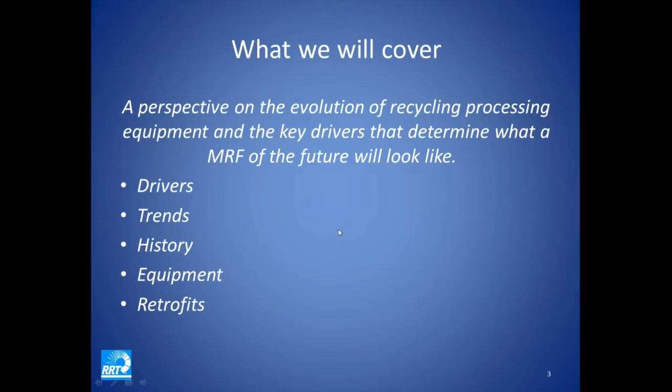So trying to see if we can have a little fun here and go through the topics that we'll be covering. A perspective on the evolution of recycling processing equipment, that's the core part of what we're covering, and the key drivers that determine what a future MRF might look like as we go forward. The agenda items are the drivers, the trends, the history, the equipment subjects, and we'll also spend a little bit of time discussing retrofits given the state of where we are with our MRF infrastructure.

So what is the future? Well, certainly the future is a reflection always of the past, and what we can see is much more commingling of materials, more types of materials, continuation of the lightweighting that we're all familiar with, where there's more units per pound, integration with collection, the careful integration of how material is collected and brought to a MRF to be processed, substantially more automation, the private sector gaining substantially more of the market share in terms of how MRFs are being owned and operated, although the public still has a very significant role in MRF ownership and operation.

What are the economic drivers and the yin and yang of the markets? So just a quick overview in terms of what is the state of the MRFs. There's about 700 plus MRFs in the United States, probably starting to push close to 800, but we're still in the 700s. I like to refer to it as the 80-20 rule, where 80% of the MRF processing is done by 20% of the actual facilities. So the point there is that there are a lot of MRFs, some 700 plus, but many of them are rather small or on the smaller side.

With regard to the players, you have large publicly traded companies that are national and have facilities spread out across various metropolitan areas, counties, and states. You have large regional facilities in different pockets of area, whether it's the Northeast of the United States or Southern California. And you have individual players that own and operate, or are a third-party processor for, one or two facilities just around a particular community within an area, like in northern Jersey as an example.

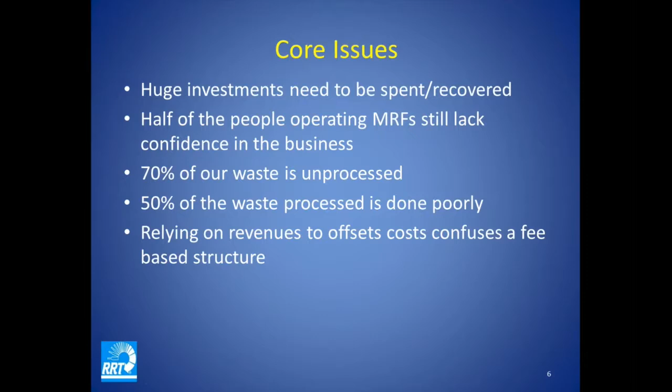70% of our waste is unprocessed, going straight to a landfill or straight to a waste-to-energy facility. 50% of our waste that is processed is done poorly. I think we all realize that. And there's a historical preponderance of relying on revenues to offset the costs of running a MRF, which confuses what should really be a fee-based structure for a MRF operation.

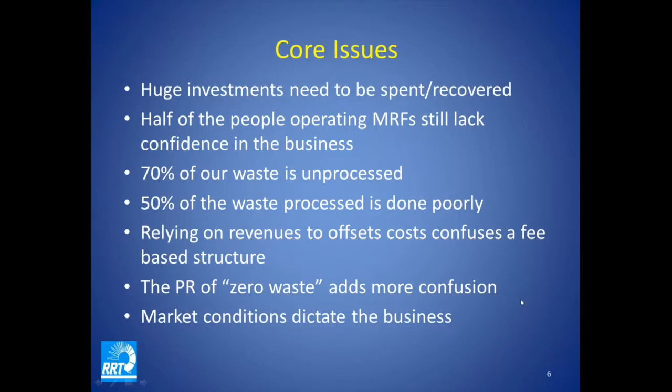The PR associated with zero waste adds substantial confusion to the industry. And always, market conditions will dictate the business - by business I mean the economics, the profitability, and the viable economic structure. It's about the market condition.

So the business theory, diagrammatically: it begins with the generator, who sets it out at the curb. We collect it, bring it to a MRF to process it. After processing, it's shipped to a market, and the end user uses the raw material to make a product, which then goes back into the economy - hence the buzzword circular economy. That is the business theory, and when it works nicely, everything works nicely in theory.

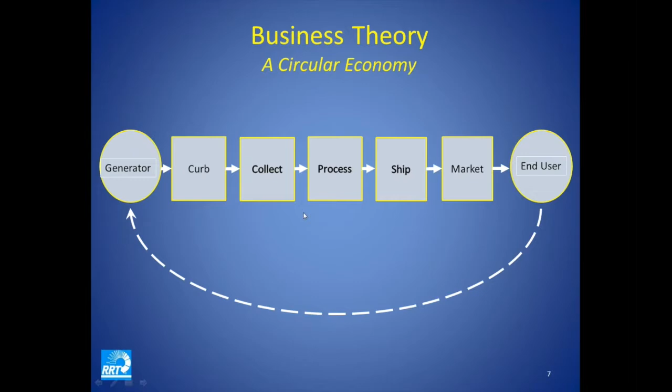In practice, we've heard lots of complaining over the last 5-10 years from MRF operators and markets about pressure and contamination. Generators provide materials that are not otherwise recyclable, and they're set out at the curb, collected, and arrive across the line at the MRF. That contamination puts a tremendous amount of pressure on a MRF operator, on MRF processing, and on the equipment.

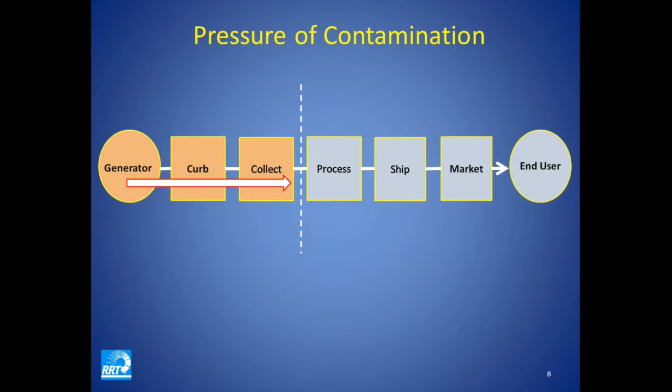We've seen that as a high topic of conversation as recently as 2017, 2016, 2015 - it was really the subject of conversation. Now in 2018, we're hearing a lot about the pressure of the markets, with end users pushing back on the markets, and the markets pushing back to the MRF. So the MRF sits in the middle, feeling pressure from both sides. Right now the loudest complaints focus around the markets, and contamination is still very much a large part of the conversation.

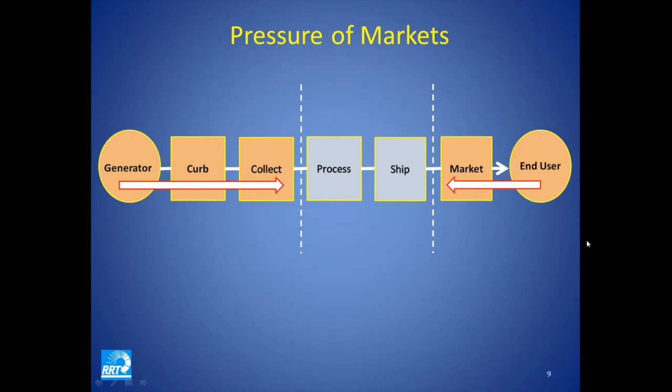Getting into MRF processing, these are the buzzwords used in the industry and at your facilities if you have a MRF or are involved in contractually overseeing one: the throughput of a facility - how many tons per hour, tons per day, tons per month, tons per year. It's a unit of measure over time.

Recovery rates - what percentage of material that comes in is actually recovered and put back into the marketplace as a commodity, with the balance considered residue, meaning material you were unable to recover. Staffing - what's the head count in the facility? Labor is the number one largest cost of a MRF operation.

Maintenance - maintenance and repair of the equipment. We have preventive maintenance, which is doing basic things to keep the equipment going, and then we have repair. The equipment is subject to the challenges of contamination and the wear and tear of the different commodities processed, which drive maintenance costs but also drive the availability of the facility - how many hours a day it's operational and able to be used, versus downtime, meaning the equipment is unable to be used because something is broken, jammed, ripped, torn, worn out, or vibrating and unsafe to use.

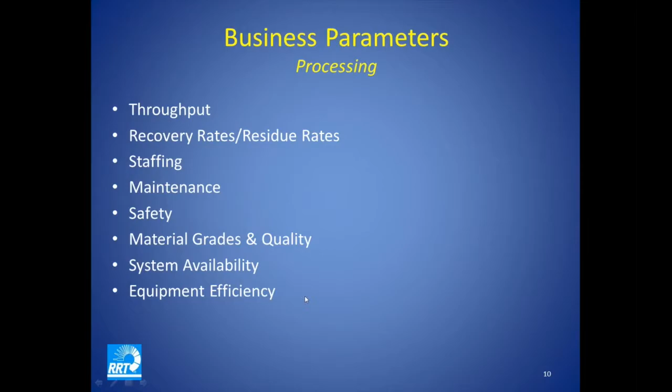The other business parameters are the material grades. How many different grades are we going to produce? What are the qualities for the grades, and how can those things be marketed and put into the marketplace? In the aggregate, we look at system availability and also the efficiency of the equipment. We start looking at different MRFs and put them side by side, trying to look for comparisons in these facilities. Those are some of the tools that are used.

There are challenges, and first of all, many of the challenges to our MRF are external. So let's talk about them.

Externally, education. Most places, it's virtually non-existent in terms of the education being provided to the generator about what's appropriate to put out at the curb, and also to the collection company about what's appropriate to be picked up from the back of a truck and brought into a facility.

Another challenge is the changes in the mix, meaning the composition of the materials. There is substantially less fiber in the stream, particularly newsprint, due to the decline in newsprint that's been occurring steadily for the last 10 years.

There is substantially more plastic in total, and different types of plastic, and complex plastics have become substantially more complex, some of which is not recyclable. And in general, a ton of material by volume is lighter by weight and more complex.

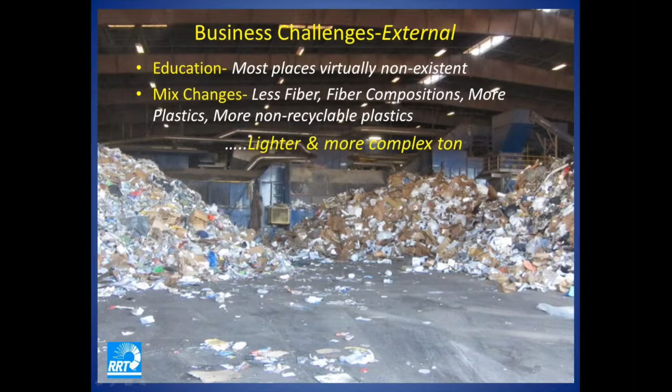The generator, on the other hand, continues to do what the generator does: purchase consumer goods, use them, dispose of them, and throw them away. So we have a lot of waste out there to recycle.

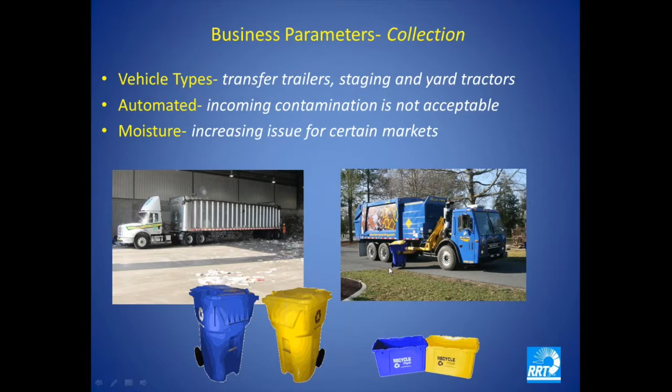So what's been the response by the business? Well, on the throughput side, as tons are getting what we call lightweighted—meaning the volume of material is increasing in proportion to the weight—composition changes, contamination increasing. The response is either we slow down the processing lines to improve quality while running more hours, or we run the lines faster to save money. Those are the two tools that are available.

Recovery rates: years ago, maybe 15, 20 years ago, 90% was the standard, meaning the expectation was that 90% of the material that came in that's recyclable would in fact be recovered and put into market. Then it moved to about 95%, probably in the last 10 years. And now more recently, it's moved up to 98.5%. That is largely based on tremendous incentives to encourage recycling, commodity prices being quite high, and the general goal in certain market areas to increase diversion. But what we're seeing is the numbers are actually sliding back to something that's more realistic, meaning hitting a high number doesn't accomplish much when you're all done.

That you have to send into a landfill, or the markets are just rejecting your loads because what you're claiming is recyclable really is just full of contamination and doesn't meet the market spec. Other business responses are staffing, adding more labor, a lot more labor, particularly what's happening over the course of this year and towards the end of last year with the National Sword on the fiber side, and adding equipment to improve quality, or just simply cutting labor and closing plants to save money.

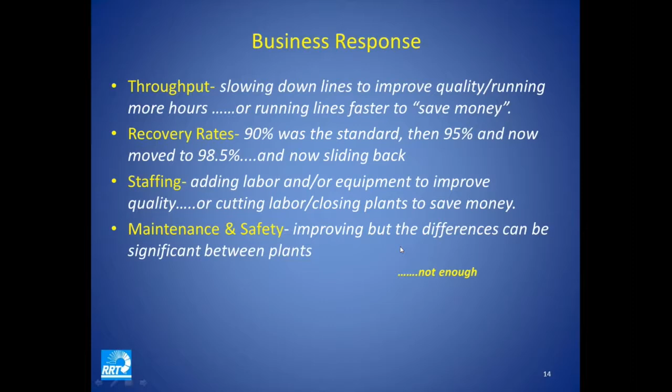Hey, Nathiel? Yes. Is there any way you can turn up your volume a little bit? There's some folks having difficulty hearing the volume. I have no problem on my computer, but there could be some issues. All right. Is this any better for everybody? A little bit of feedback, but it is louder.

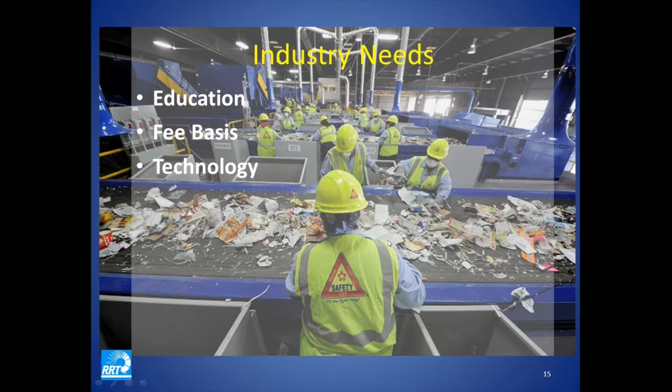Okay. So in terms of industry needs, some of the things that the industry is looking for are education of the public, a fee-based economic structure for the MRF operation, and technology. And technology is a big part of what we want to talk about today, so I'm going to start moving into that. But the frustrations around the technology involve generally a fascination over technology. We all see the ads in the various magazines, whether it's Recycling Today or Resource Recycling, and the many publications like Waste 360. A lot of nice ads and interesting pieces of equipment that could be very useful, and in many cases are extremely useful, but the justifications are weak oftentimes to support the implementation of some of this equipment.

Reliability of equipment is still in that 85 to 90% realistically, which is pretty low in comparison to other industries. Screens have plateaued or are declining in popularity, and we'll talk about that. Quality of equipment: some claims are honest and substantiated, in other cases they're unsubstantiated. Fire and safety: unfortunately we have fires in our industry more than anybody really cares to admit. They're quite common. Some facilities have fires as often as once a month. And the dust and noise levels are significant. Significant work needs to be done. And then of course you want to add to that everything that we don't control, which is a lot.

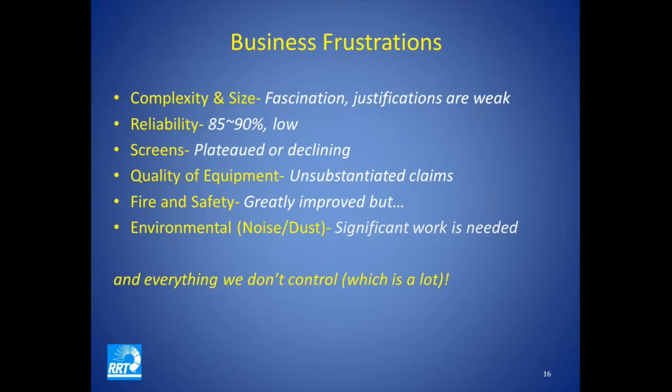Hopefully my sound improved a little bit for everybody. Does that sound okay? Maybe Wayne, you can get a read from some of the folks that are attending. Seems okay. Okay, very good.

I'll continue. So business challenges in the markets: the effort to market is increasing. Marketing demands more time than before, particularly with deductions for quality and moisture, and arranging for containers and trailers can be quite difficult, particularly in an export market, and particularly given the fact that the market liquidity in 2018 can only be described as awful. I don't know any other way to say it politely. News will continue to be less available as a commodity grade, and naturally the ONP grade is gone. And the mixed paper grade is growing, hard and soft mix, but it has its challenges this year, in particular with the market liquidity.

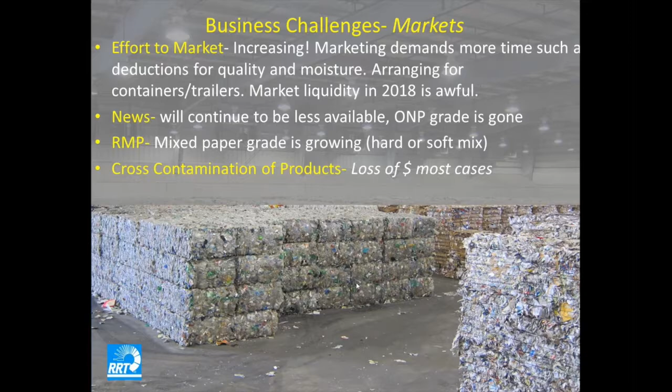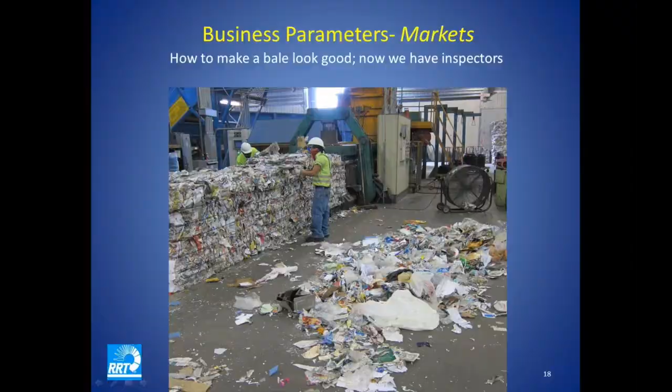Glass, I don't know if I want to get into a big conversation on glass, other than it continues to be a challenge. Some programs are continuing to discontinue glass. It's a challenge everywhere in terms of marketing.

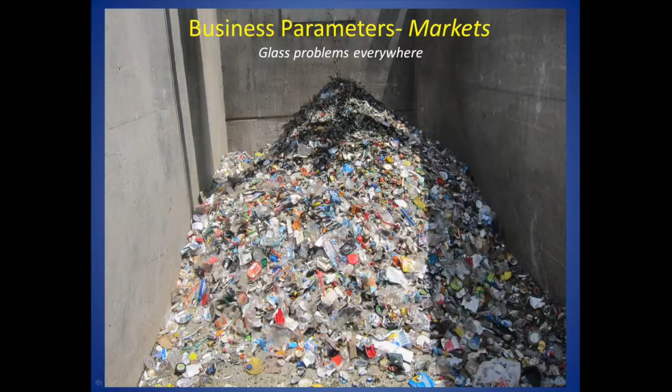So what are some of the current measures that are being used on the equipment side? Doing plant audits and performance evaluations, moving forward towards a processing fee based model, shifting away from sorting screens and modifying what we have, rebalancing the lines, meaning you could have on a MRF, you could have 3 fiber lines based on the split from the different screens, and we may see more material on one line than we ever saw before, and the other 2 lines have very little, so we need to rebalance the lines, and that can make a significant difference.

Looking at better ways to deal with film. A lot of facilities have put in film collection systems, consuming a lot of electricity, making a lot of noise, not necessarily improving the health environment within the facility. And then the film itself, once it's packaged up into a bale, the markets for those are slim to none in most cases. So ultimately, landfill becomes the path there.

Hub and spoke approaches in terms of transferring tons long distances and bringing them into a facility. So more tons into one facility will allow smaller facilities that are not too efficient to be closed down, and the larger facility runs those tons on the second shift.

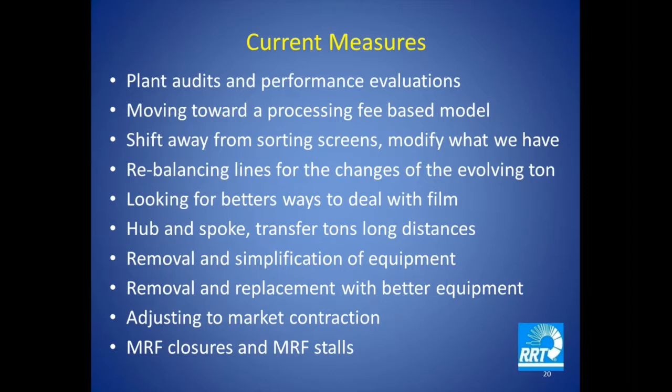One of the popular things that we're seeing is just removing equipment. Too much equipment in the plant, getting the plants to be simpler, and when removing it, in some cases, replacing equipment with better equipment. One piece of equipment could do the job of 3. And particularly today, a lot of folks are adjusting to the market contraction. And in part, it's leading to MRF closures and MRF stalls.

So what are some of the real game changers that occurred in the past 20, 25 years in terms of how we got to where we are? I was asked to talk a little bit about the past. So in the past, and some of the things that have evolved, for example, I'm not going to go through all these, but automated collection is a significant change of technology on the collection side.

On the processing side, where we're doing batch baling, in the early days of a MRF you would typically see 1 baler per commodity. You walk in the facility, you could see 5, 6, 7 balers, all small little balers. Now we see 1 baler or 2 balers, and they're baling all the commodities by batch baling.

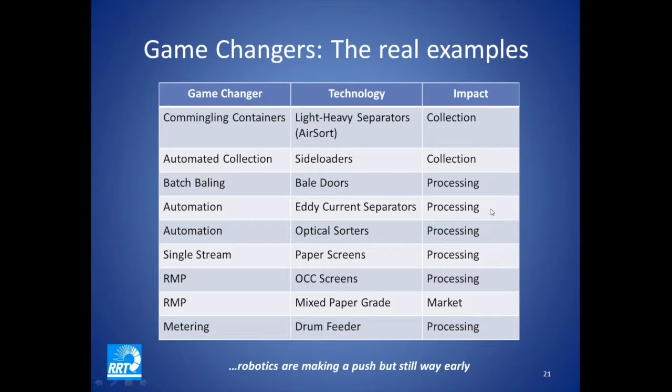A significant amount of automation was introduced with eddy current separators that were introduced in the early 90s, optical sorters more so in the late 90s, and they've really come into full swing in the last 10, 15 years, where all facilities have them today, certainly any new facility. The use of paper screens with the advent of single stream, and of course the OCC screen.

So here's some photos, just from a collection of photos that I've saved over the years. These are quite old, but basically this is how recycling and sorting was being done. People standing in a pit and on a conveyor that would be stopped, and they'd stand in front of a pile and sort the material on a conveyor belt that would be baled, and they would get out of the pit, and then they would wait until the pit cleared, and they would repeat this all day long.

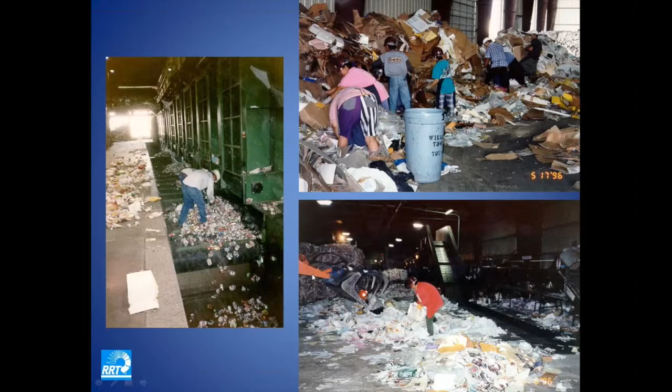And some of these photos are really not even that old. Material coming out of a bunker that's going to run up to a baler. This is aluminum. This is a method of doing quality control for aluminum. Hopefully no one's doing this today. Sorting cardboard, as you can see here in this photo. This one is date stamped 96. Here's another one sorting paper on the floor.

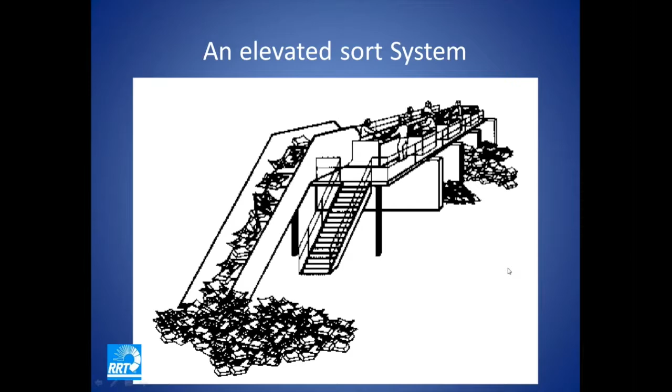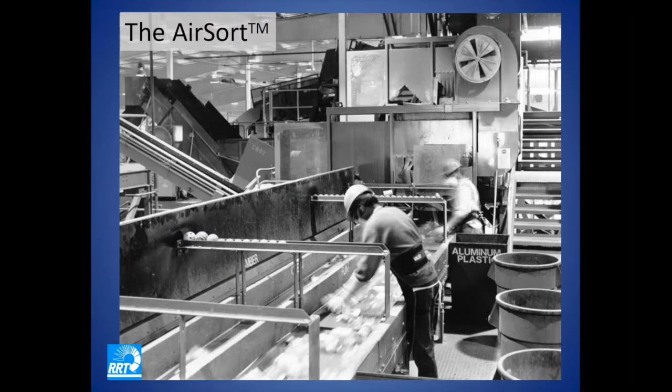So big technology leap. This sorting system was invented, and this became the technology breakthrough of having an elevated sorting system. And believe it or not, this was a breakthrough technology in the early 90s. And from there, we started putting people on the line, and in order to accommodate different commodities, you would just need to have a lot of people on the line side by side. And in this case, you see here people sorting glass along a 3-line conveyor.

But optical sorting stepped in its place, and optical sorting very effectively displaces the use of all these people and allows for this automated separation of glass, plastic, and paper. And the dominant use has been on the plastic side, but it's growing very rapidly in paper, and we'll talk about that.

This is what I meant earlier about batch baling, where the commodities are separated into separate bins, and then each bin can be fed individually to the baler that's in the foreground on the left-hand side.

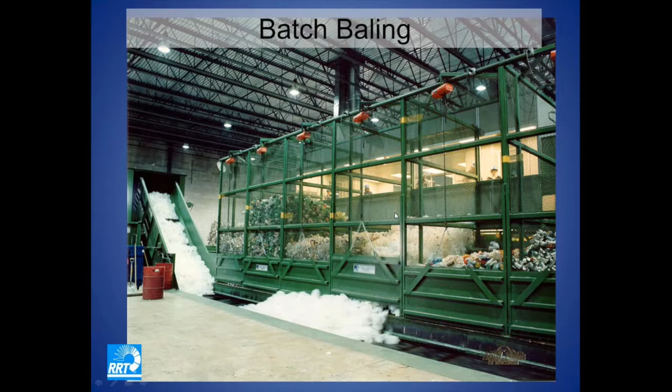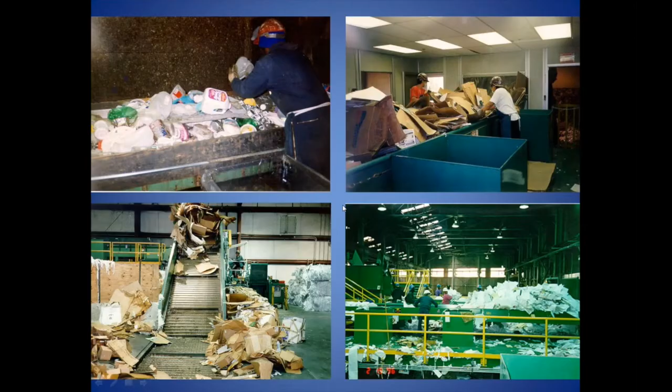Okay, not a pleasant sight to see, but before metering drums were available, this was not an uncommon event where material would be overfed to a line and you would run into this situation. So to avoid this, operators would tend to underfeed to make sure they wouldn't cause this problem to occur. And these are more photos showing what's happening when feeding is not done correctly.

So the metering drum, or the storage bunker with the drum feeder, people use different terms for it, has allowed material to be fed to sorters at a more uniform rate, which has allowed us to avoid these kinds of problems you see in the photos here, where there's an avalanche of material, for example, in the lower right-hand corner, and there's hardly any material on the left side here.

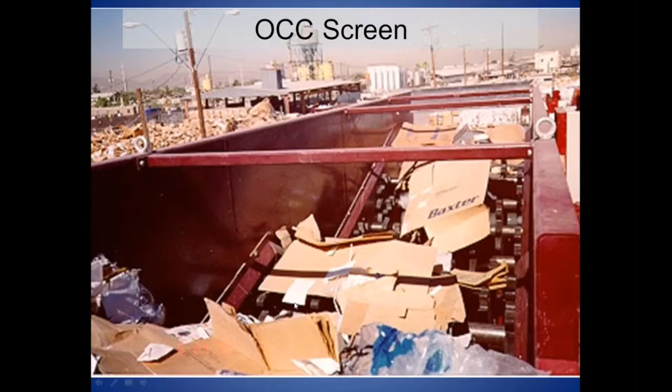Probably one of my favorite pieces of technology that got introduced in the market that really was a significant game changer was the OCC screen. Some people call it the OCC separator. Old corrugated containers: a device that separates cardboard from everything else simply based on its size, its rigidity, and its ability to bounce across the screens while allowing other things to fall through.

Such a simple piece of equipment that really, from a bang for the buck, is incredibly simple and useful in every facility. And by the way, it was introduced somewhere around the '95, '96, '97 period, and still is in everybody's stable as a piece of equipment.

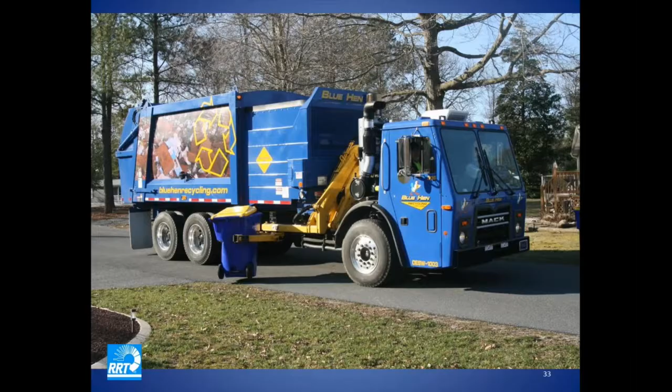Today, more common is a large bin with a cover on it and a side loader for collection. Driver stays in the cab. So much safer, so much more efficient, and so much more environmentally friendly compared to the other approach, with litter and debris and snow and rain, etc.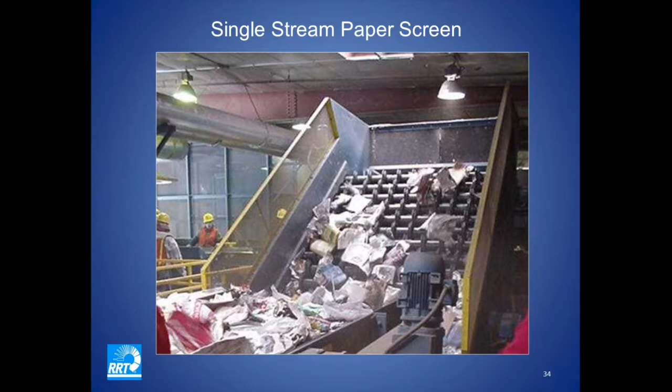Moving along on technology, single stream. The single stream paper screen allowed communities to consolidate their containers with their fiber into a single stream, allowing for easier collection, higher recovery rates. But on the other hand, it also requires substantially more investment in equipment to separate everything back into the individual constituents of paper, glass, plastic, and metal. So these paper screens get that job done.

Some game changers at the MRF that didn't take, for example, was putting all your recyclables in a plastic bag and having it collected at the curb and then brought into a machine that would debag it. Thankfully, that technology didn't go forward. Other technologies were, for example, perforating the plastic because the balers were incapable of making a bale of plastic without all the bales falling apart. Well, we've overcome that problem, so no more perforators in our facilities.

People had the idea of, why can't we add textiles? Why can't we add wood? Well, thankfully that idea went away. So there have been a lot of different ideas that different people have had nationwide to try to make changes to MRF operations. Some examples took and some didn't.

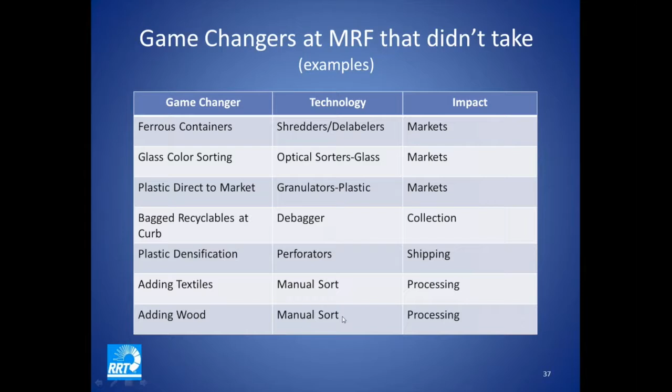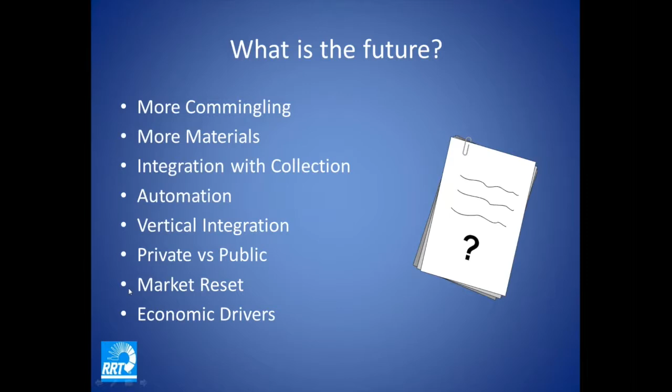So what's the future? Well, the future is, as we mentioned earlier, more commingling, more material types, integration with collection, and definitely seeing the private sector being substantially more focused on their activities, communicating what's going on in the facility, being very transparent on their costs, and being much more, let's call it, customer oriented in terms of generators and also municipalities in sorting through and trying to solve problems together, particularly given the market reset that's going on and the economic drivers.

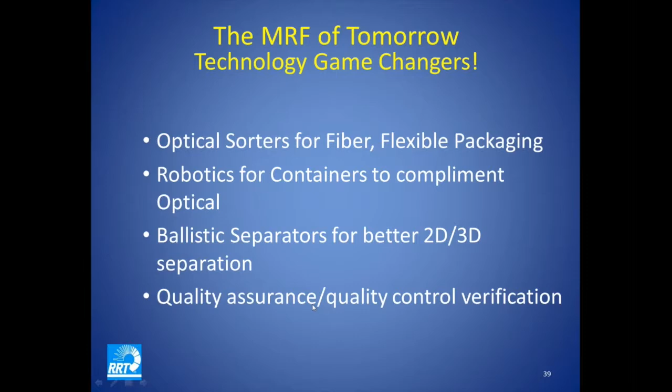So what are the technology game changers for the MRF of tomorrow? Well, I've outlined them here. Optical sorters, more of them, and in particular for fiber and flexible packaging. Robotics for containers to complement optical, and ballistic separators for better 2D and 3D separation. And then finally, quality assurance and quality control verification, as opposed to just making a bale and hoping for the best.

So optical sorting, what's the driver behind optical sorting? Why? Well, first of all, manual reduction of labor is important. Improving the quality of the material by removing items through optical sorting, being able to increase your throughput dramatically. The machines can sort substantially faster and quicker in a smaller footprint.

Recyclables, particularly plastics, than people can. And there's consistency, meaning the machine works every day. People get tired, people don't show up, people go on breaks, people get distracted.

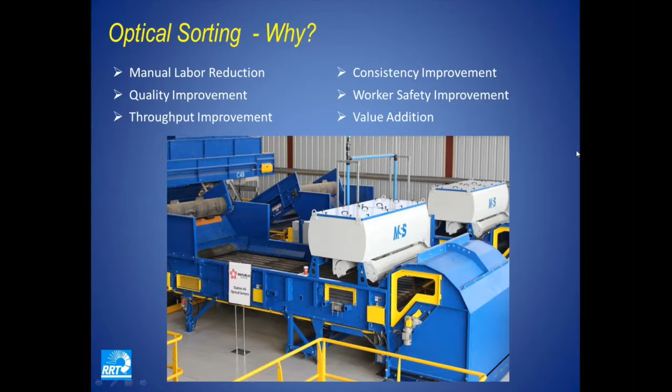There's been an improvement in worker safety by the reduction of people, and just in general providing value to the facility. So the technology that's used in optical sorting centers around three basic concepts. One is color detection, one is near infrared or NIR sensors, and the other is metal detection. And more recently, although it's not on the slide, you're going to hear a little bit more about laser, which is just another form of light to detect objects.

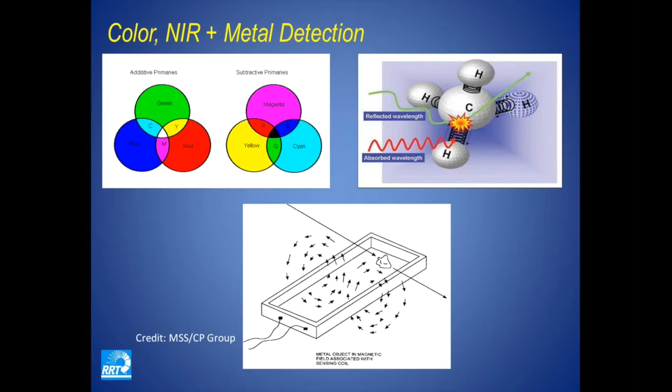And once those objects are detected, they're identified, and once they're identified through a computer programming feature, you can start to eject that material. So in principle, how the machine works: the containers fall on a conveyor belt, and as the material passes underneath camera and sensors, the sensor being in orange, the light that's being shined is gray, the signal is picked up by this red box, and the red box sends an electrical signal to a valve that opens up.

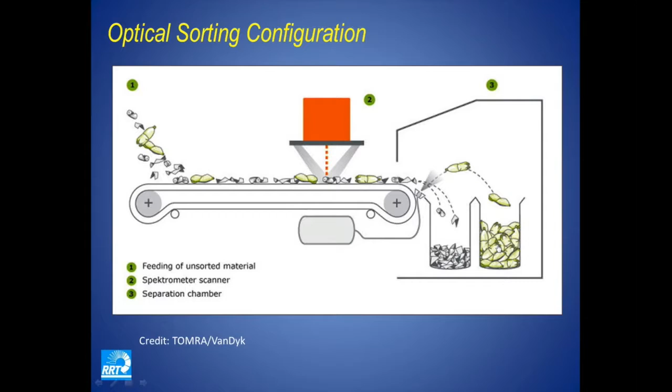Air that ejects a puff of air and blows a particular item off to the other side of this splitter here. And by doing so, we can separate what you see here in green from what you see here that's not green.

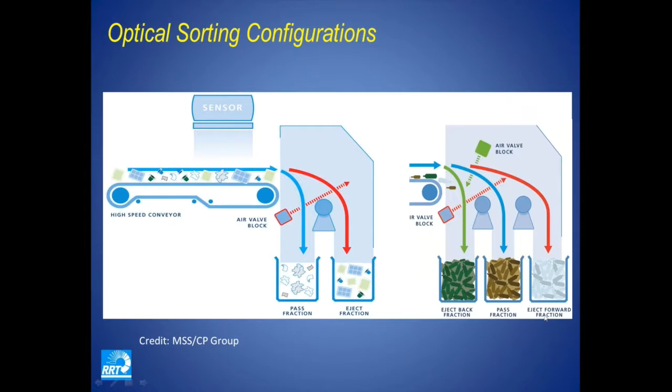And there's different configurations. We can either blow in one direction, or we can blow in two directions. So we have what's called an air valve block. So simultaneously, we can make three separate separations. The green pointing in this direction, the red pointing across that direction, and whatever's left over falls in the middle. And we call that the eject fraction in the back, the eject fraction in the front, and then the pass fraction.

So what are the new developments? I mean, I guess you guys can't miss the words I have here: fiber, fiber, fiber. And that is in general the interest of using optical sorter to improve the quality of fiber.

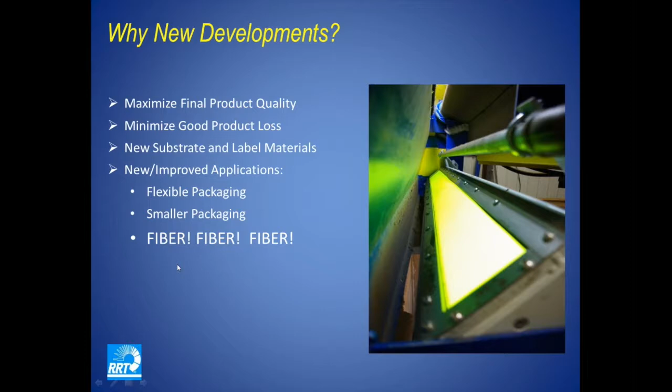And in how optical sorters are used today, they're substantially wider. They can be well over 2 meters in width. You can put them side by side as you see here. And we can use these optical sorters today extremely effectively, and there's a few manufacturers today that offer this, and be able to eject fiber, meaning if you have a stream of material of containers and fiber mixed together, you can target the fiber and eject it.

We would call that positive sorting, the item that you eject. Alternatively, if you have fiber and containers, and within that fiber stream you've separated the fiber, but now you want to separate the fiber by grade or by removing the contaminants, what's not fiber, which are the prohibitives. You could eject the prohibitives, that aluminum can or that plastic bottle, or you can eject the outthrows if you're making a news grade or a mixed paper grade by ejecting the browns or the cardboard.

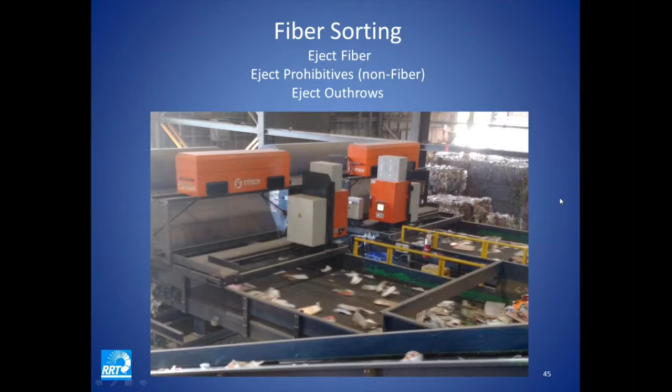So it would not be uncommon today in a MRF new facility that's being built to see optical sorting on fiber systems, largely because of not only what the market conditions are, but also for the reasons noted earlier: the lightweighting of material with these aluminum cans and plastic bottles getting squashed and getting stuck in between the paper, and the market conditions that are driving for higher quality products, and in general, the cost of labor and all the issues around having labor when a machine can perform that task.

Changing gears: robotics, robots, or artificial intelligence. These are kind of the buzzwords you see in the advertising or at trade show floors or papers that are being written. So what can we say about it? What we can say is there's 4 companies so far in this market area. In general, what are we using it for? Quality control sorting, generally for containers. So let's say we optically sorted out all the PET and we want to make sure that we're producing a clean PET bale.

Rather than having a person QC that material before it runs off into a bin for baling, we would use this robotic device that would do the quality control, meaning it would remove the HDPE, the aluminum can, or anything else that got in there that shouldn't be there.

So where do we see them? At the end of the lines, downstream of the MRF towards the end. When will we see them? For the next 5 to 10 years, we'll start seeing them used more commonly. We know some have already been put in over the past year. The reason is to improve processing.

How does it work? It basically takes a lot of the features of an optical sorter, metal sensors, 3D laser cameras, and NIR sensors. With all that programming, it creates a memory concept where the computer will remember different objects based on their characteristics.

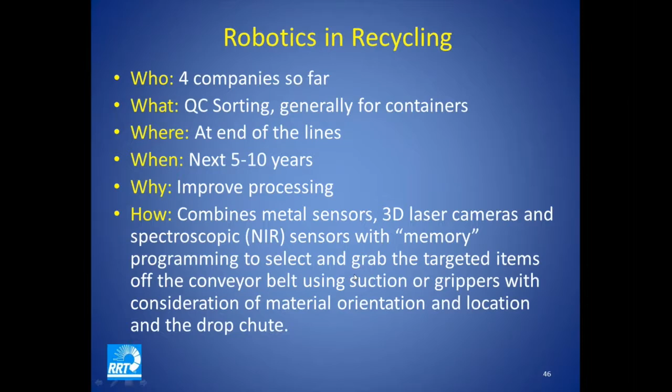The technology itself is unit-based, meaning it's just like manual sorting. People say sorters can sort 45, 50, 60 pieces a minute. In effect, the robotic technology is pretty much at the same level, about 60 pieces a minute. But we have to be careful about ton-per-hour claims made by technology providers, because that's not necessarily an accurate measurement since you're sorting units, bottles and cans, and you can only do so many per minute or per hour.

Converting that to weight, meaning tons per hour, depends on the density of the object. So be very careful using ton-per-hour claims, because this is really a unit-based technology. It is capital intensive, and the results can be perhaps cost neutral, so we have to watch that.

The technology is going to continue improving naturally, so it's getting ready for what I'd call prime time. And the market changes will drive this game changer — whatever the markets are demanding on the outside of the MRF will drive this. So as long as MRFs can simultaneously increase their throughput, it's going to drive the use of this technology, meaning it can get a return on its investment.

One of the things that would help is a good commodity run where prices are running high, or the reverse, a bad commodity fall, which would be a defensive measure to put in robotics.

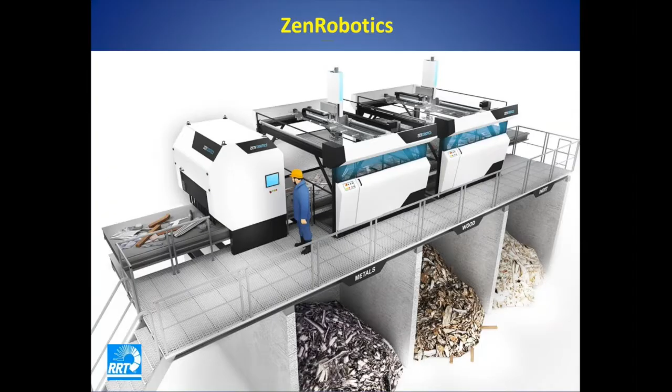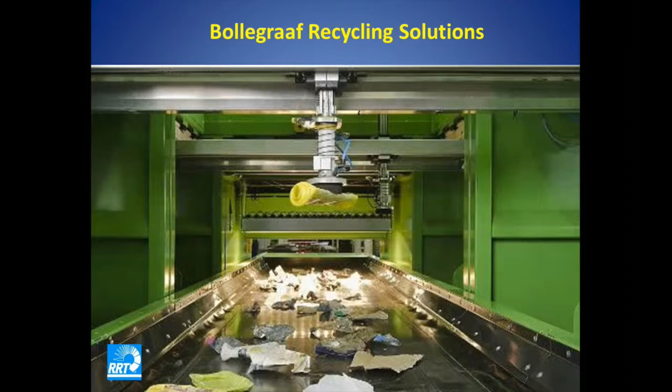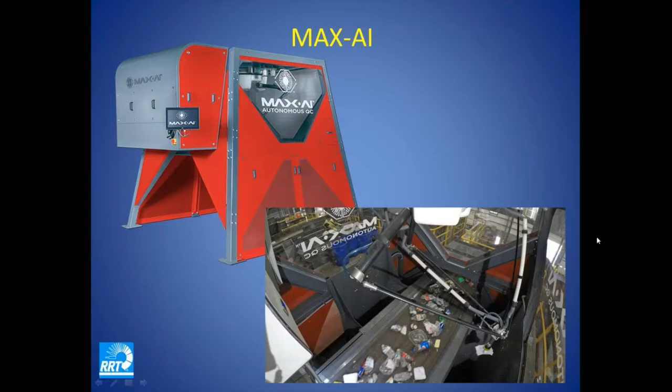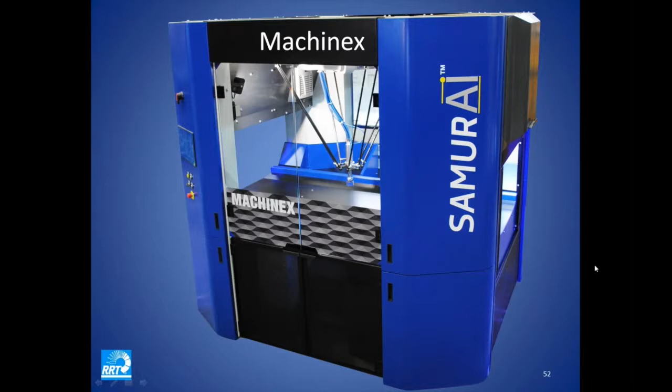A few of the technology providers: ZenRobotics, which you may be familiar with, mostly working in construction and demolition waste. Bollegraaf, a longtime supplier of technology to our industry — you can see here the use of a suction grabbing arm that travels in and out of view, left to right, and lifts the item up. Another device here is from Max-AI, offered through BHS, Bulk Handling Systems, and AMP Robotics, also suction technology. And Machinex introduced their machine this year at WasteExpo, also using suction-based technology.

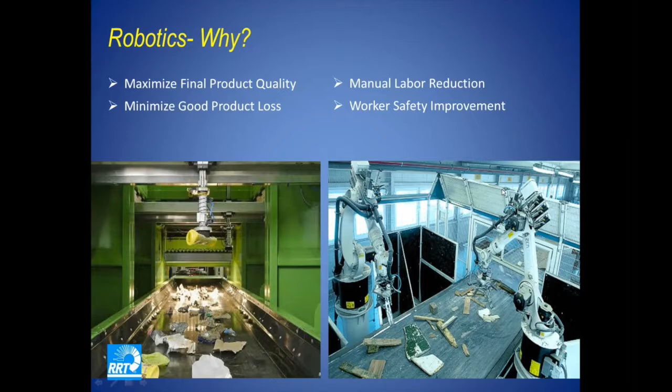So why robotics? It maximizes final product quality, minimizes good product loss, reduces labor, and improves safety.

In summary, it's following the route of optical sorting. Sort speed per robot matches human speed. It's well suited for quality control after optical sorting, and it achieves higher purity results than optical. It's very accurate, grabbing one object at a time versus optical, which ejects and can cause collateral damage — blowing one object can blow others with it.

But there's much lower throughput than optical, much lower. The grippers and suction are prone to wear and tear. So these are some things to keep in mind.

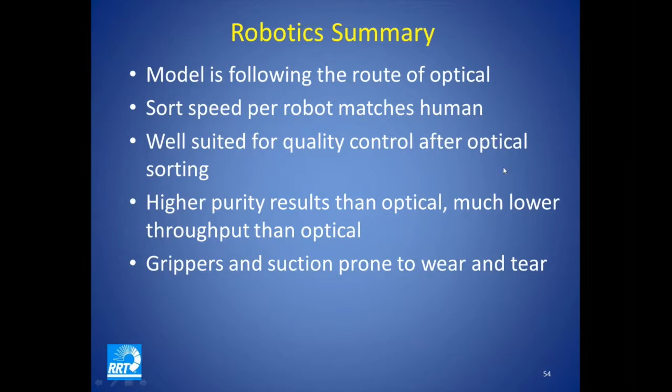The applications are all around quality control features downstream, and also the potential — although I'm not aware of any yet — for removing browns on a fiber line, and being the last-chance sorter on the residue line. As residue heads out to the roll-off box or compactor, introducing a device like this could remove a multitude of items off that belt.

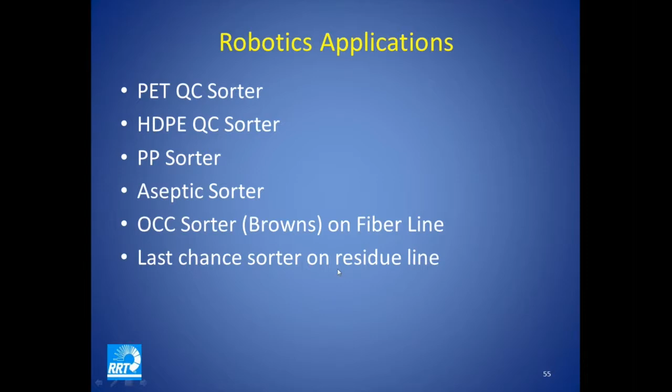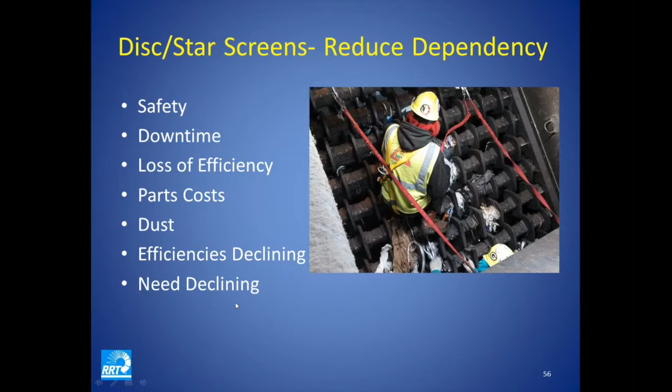Changing gears now to screens. Most people don't like screens. There's safety issues, downtime, screens wrap and jam, loss of efficiency. The parts are very expensive. They create a lot of dust through the agitation. The efficiencies decline from the time you start running the piece of equipment until the next time you clean it. In between that period of time, the efficiency is declining rapidly, which means the quality control on those products is declining as you go forward. So therefore the need for them is declining, the interest is declining. What are the alternatives to screens?

Well, one approach is just to change it and repackage it in a different way. It's still a screen, but reduce the angle of it so it's more horizontal. Change the speed so there's less agitation and it's more size driven. Change the diameter of the shafts so it provides an anti-wrapping feature, because the larger the diameter of the shaft, the more difficult it is for material to wrap around the circumference of that shaft. Making one product grade, meaning just try not to get involved in trying to make a news grade versus a mixed paper grade. Just make it all one grade.

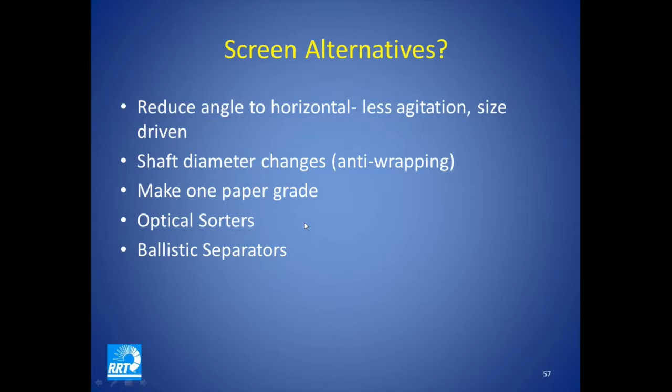And the alternatives, of course, are optical sorters and ballistic separators, where optical sorters and ballistic separators can do a lot of the same work a screen can do, particularly today.

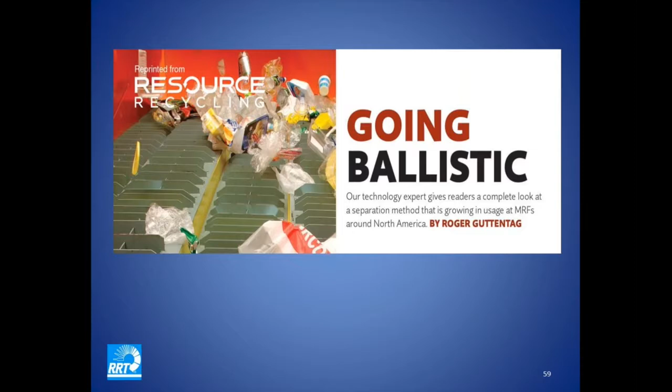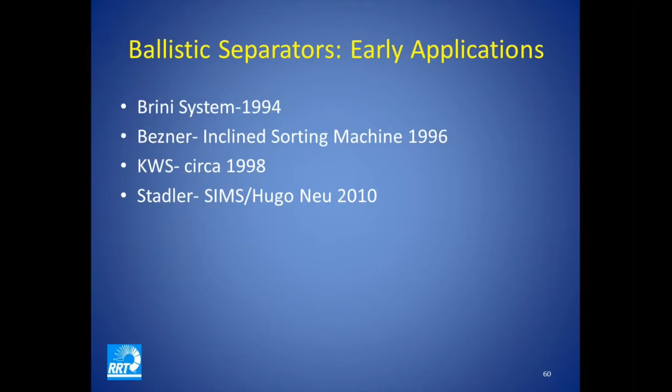So ballistic separators. Nice article written by Roger Guttentag in Resource Recycling about a year or so ago. Quick history: first started in 1994. It's not really a new technology, and it went through different periods of time in 1996, 98, and then there was a loss of interest. But Stadler, manufacturer, came to the U.S., and Sims, large processor of recyclables and the largest ferrous scrap recycler I believe in the world, installed some units in 2010 in New York.

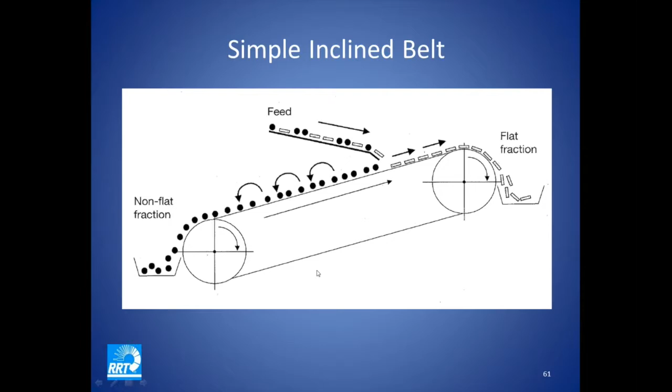The basic principle of the inclined belt was, as material dropped on the belt, as the belt traveled to the right, the objects that were three-dimensional would bounce and fall to the left, thereby separating from the flat material, which would be paper and cardboard, from those round objects, which would be bottles and cans that would run to the rear. This is the most crude version of a ballistic separator conveyor belt.

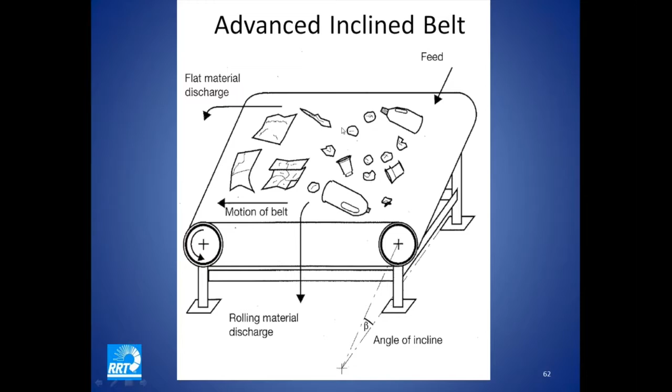Then other technology advancement through a company called Besner, where you feed the material in the upper right-hand corner, the belt travels from right to left, but meanwhile the belt's inclined, so material can actually roll down the edge of the belt. So this is like a three-dimensional, three-way activity here. And under this belt are devices that are banging or beating the belt upward, which is causing this material to bounce. And that bouncing encourages the rolling of material. This is just the city of Phoenix, which has a system like that installed.

So ballistic separators today work with the same principle, but different equipment. That consists of long paddles, in linear lines, and these linear lines move in an elliptical fashion, meaning they rotate up and down, like an elliptical machine for exercising. These paddles are aligned side by side with each other, and this elliptical pattern on an incline going up forces paper and flat objects to pull off the top, and the containers to roll towards the back, and there are openings in these paddles that allow glass and trash to fall through.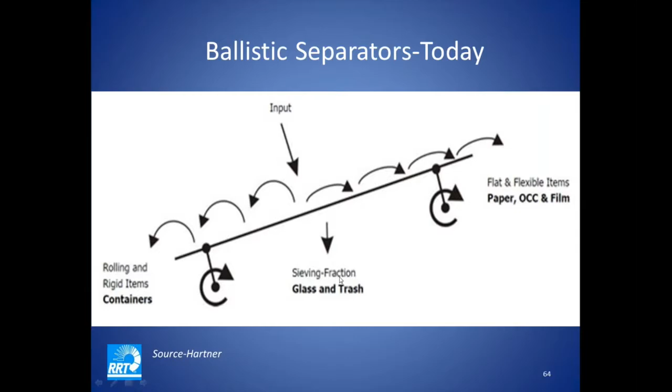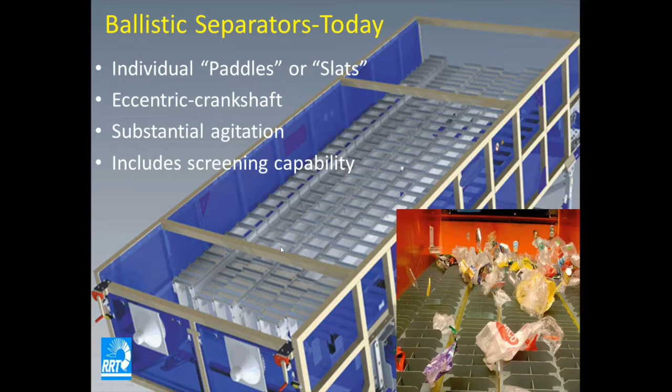So here's a photograph of them, and you can see the individual paddles here: 1, 2, 3, 4, 5, 6, 7, and an 8th in the unit. Here's another close-up of them. These paddles run on an eccentric crankshaft, and as it goes up and down, they individually move - one goes up, the other one goes down, this one goes up, that one goes down, and at the same time they're moving forward. So that creates the agitation. The incline allows for the rollback.

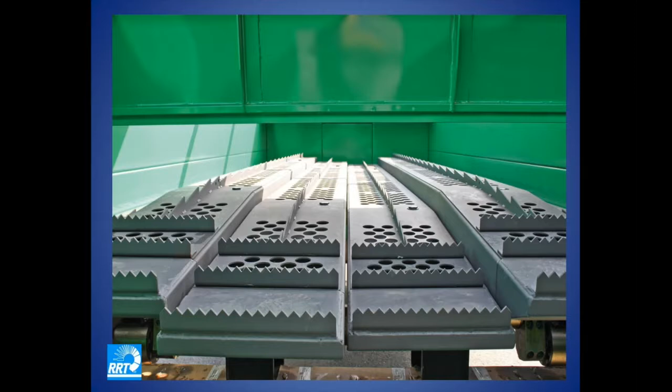And here's just a real close-up view here. These are little grippers that'll, and the materials would be traveling towards us in here.

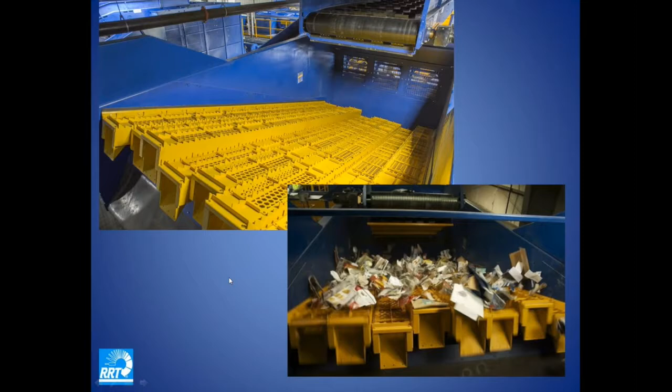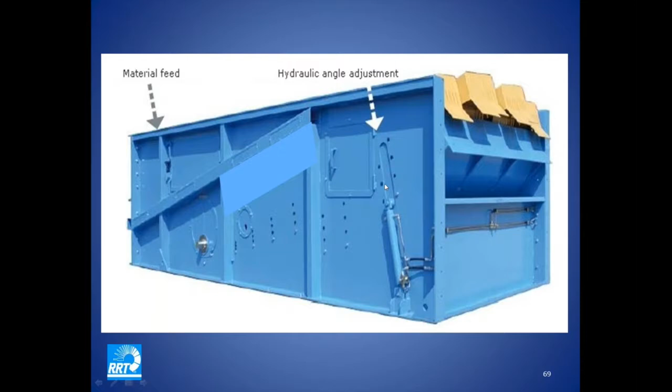And here's another view of these ballistic separators. Some of the features with ballistic separators, besides being able to change the speed of how they go up and down and they travel forward and back simultaneously, is you can change the angle of them, which is also an interesting feature.

So why the interest in ballistic separators? Why introduce a new technology? Well, first of all, there's no wrapping on them at all. And there's no dust. You don't get that agitation with the paper where things are flying around all over the place and creating dust and commotion.

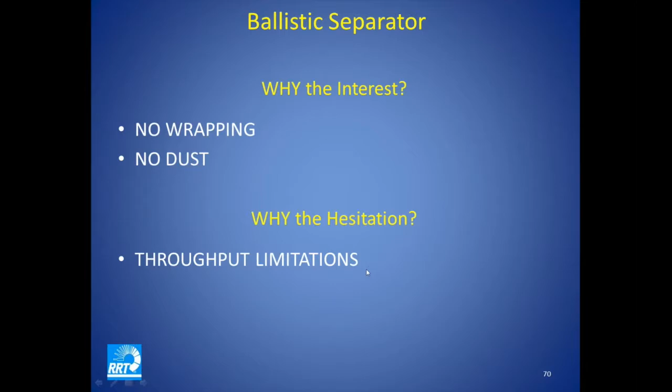So these two objections of screening technology have pushed a large interest in ballistic separators. So why is there hesitation in the marketplace? Why are people not just ripping out all their screens and putting in ballistic separators? Very simple, throughput limitations. These ballistic separators, because they have less agitation, once the machine gets flooded, it's difficult to move a lot of throughput. So the manufacturers of the ballistic separators are working on how to improve their throughput by making the machines wider, stacking the machines, and doing other techniques. And we expect to see that in the future as being a direction for the marketplace.

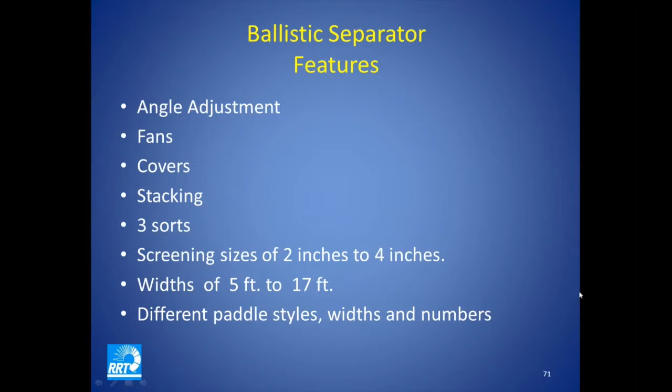Some of the features I mentioned earlier is the ability to adjust the angles, fans, covers, having different size screens, the width of the units ranging 5 feet even up to 17 feet in different paddle styles. So there's a lot of options available with ballistic separators.

Because anytime we talk about technology and we talk about the past, present, and future, in effect, we're also talking about retrofits, because by and large, there's only a handful, maybe 5 facilities that are built in the United States a year that are new. In general, all the activity is about retrofits.

So how do we accommodate a retrofit, and what are some of the questions that should be asked when doing a retrofit? Essentially you're dealing with your operating plan. And so you would want to know how you staff your operating hours, how you're producing your different grades, in what order you're baling different products, and how you're processing different materials.

And traditionally, all those kind of questions, you wouldn't necessarily consider this under a retrofit, but a retrofit implies that you want to change. So if you want to change your facility based on a capital investment, you should also look at changing your operating plan as well. And maybe you change your operating plan first, and that may diminish the need for your retrofit, perhaps.

Diving deeper, the first question a MRF operator should ask is always, what is the problem we're trying to solve? Is the problem that we're trying to solve really an equipment problem? Probably not. It's either a financial problem where the facility is not making money, or it's in the red, or we have some financial issues, or we're trying to solve a throughput problem, meaning we're not able to get enough tons through the plant, or it's a material quality problem. We're not producing a material that meets the market quality. Those are the problems we're really trying to solve.

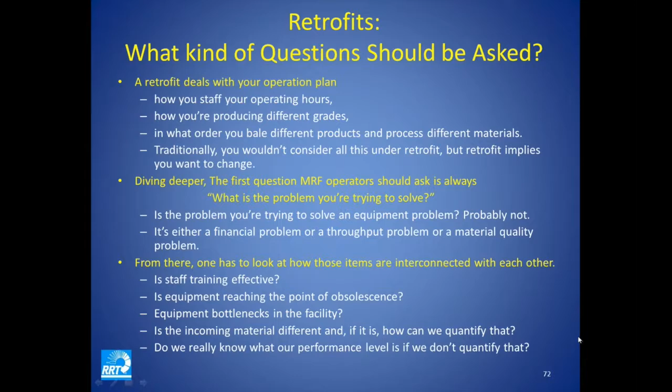So trying to do better is great and admirable, but better than what? You have to know where you are as a baseline. Other comments on retrofits is what should an operator look for when selecting equipment manufacturers?

Meaning, who do I buy from and what do I buy? Here are a few areas of conversation. What is the capacity of that piece of equipment, production? Capacity can be measured in tons, but it could also be measured in terms of volume.

And that's important since it's unit-based. How safe is that piece of equipment? What is the cost, and what is the indirect related cost of that equipment?

Meaning, what kind of power do I need? Platform supported, conveyors, compressed air, dust control equipment. What are my permitting requirements? So there's a lot of collateral costs or indirect costs related to the equipment.

And what is the equipment manufacturer's flexibility to customize the equipment? After all, if we're doing a retrofit, I have an existing facility, so I don't think I can really buy something that's going to fit right in. So either I have to change what I have, or the manufacturer has to be flexible enough to customize this piece of equipment, make it shorter, longer, wider, narrower, etc.

Has the individuals from the engineering team actually been to the facility, not the salespeople, but the engineering people from the company, studied and thoroughly analyzed what really would be the right type of equipment, the best piece of equipment. And of course, the quality of the piece of equipment is critical, as is the ability of the equipment to produce quality products. So they go hand in hand.

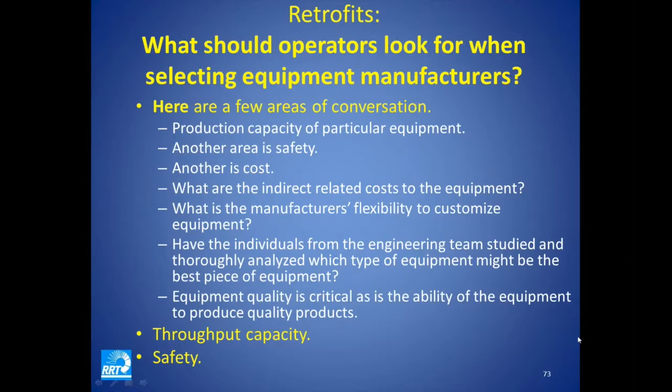Naturally, throughput capacity seems to be the yardstick everybody wants to talk about, the 25 ton per hour or the 30 ton an hour. So throughput is naturally a factor. And then safety. It's not just the safety of the piece of equipment, but also the implementation of that piece of equipment. Does it make my plant safer, or do I now result in more safety issues?

So some final thoughts. We have lots to do, and huge investments need to be spent. 70% of our waste is still unprocessed, so there's a lot of opportunity here, of work in front of us, and of what is being processed. We're still not there in terms of doing it very well.

And we need to keep working on moving towards a fee-based structure for how the business model works rather than revenue-based. Commodity markets are reacting to the evolving ton, meaning as the ton became more contaminated and more issues, markets today are pushing back and they're looking for 0.5% contamination in bales of fiber on the global market side, but the domestic markets are reacting as well to what the global markets are.

So we're seeing the domestic markets tightening right in line with the global markets, and that's putting a lot of pressure on the operations.

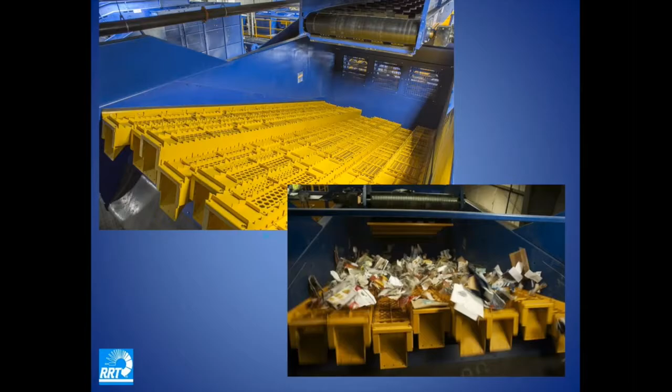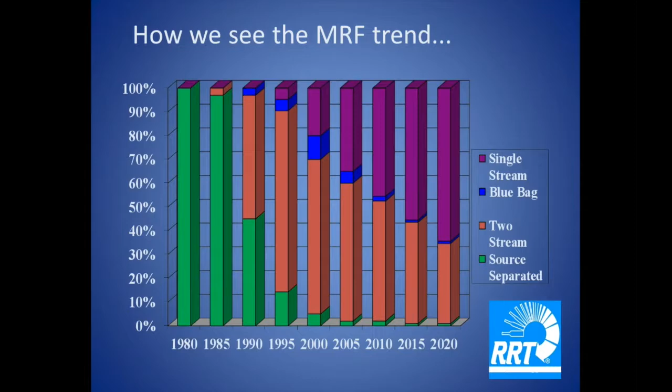Have there been any new developments that would allow an economical sorting of glass at MRFs? No, is the short answer. Economical sorting of glass generally is done in the concept of particle size. Glass is broken, and there's been efforts to screen glass out, and that's pretty straightforward, where we screen out the fine material. Anything less than 1/4 inch or 3/8 of an inch is screened out and considered to not go to a facility that's going to optically sort the glass into its different colors. And then there's the need to vacuum off and remove all the paper labels and the shreds and things like that. But generally, the problem with glass is a tonnage issue. Although by weight it may seem like a significant amount, the amount of material in glass, in proportion to the type of equipment and CapEx and OpEx to run that equipment, the numbers just don't add up.

The math doesn't work.

Okay, follow-up question to that. Can optical sorters find the caps and lids of plastic containers? Optical sorters can definitely find the caps and lids of plastic containers, but if they're screwed on... the way a bottle is constructed is you have the body of the bottle, and then you have the cap that's screwed on to that body.

If the cap is screwed on, it's going to ignore that type of plastic. It's going to look at the body, which is the predominant item. It's not going to be able to separate the cap from the body. If the cap was individually on a conveyor belt and there was just nothing but caps, no problem. It would be able to separate those.